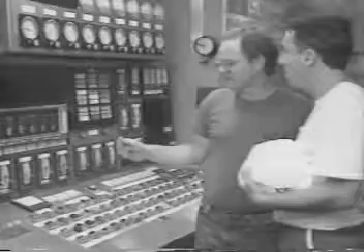The controller plays a critical role in any automated process because it's responsible for making the decisions that affect the process variables. However, the controller is only one of several components in a feedback control loop.

A control loop is designed to respond to upsets in the process. Upsets are external conditions that change the demand placed on the process. These conditions cause changes in the controlled variable. Information about these changes is gathered by the sensor.

The sensor changes this value to a signal, which is sent by the transmitter to the controller. The controller compares the signal to a set point and, based on the deviation, decides if any action needs to be taken. The controller's output signal positions the final control element.

The final control element responds to this signal by changing the value of the manipulated variable. The manipulated variable, in turn, affects the value of the controlled variable, which is again detected by the sensor. The cycle is repeated until the value of the controlled variable matches the set point.

How this is accomplished, that is, the mode of control action, is a function of the controller. There are 4 modes of control: two-position, proportional, integral, and derivative. Two-position or on-off control is discrete, so that the signal to the final control element is either 0 or 100%. Proportional, integral, and derivative control are continuous modes of control. Controllers may have one or more of these control modes.

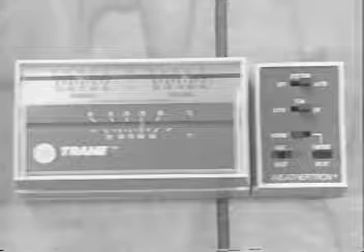Let's look at two-position control first. It's the simplest mode. A heating system, for example, might use this type of control. The heating system turns on when the room temperature falls below a set point. When temperature exceeds the set point, the system turns off. In other words, it has 2 positions, on and off.

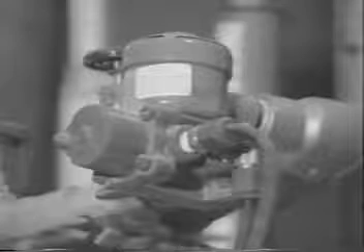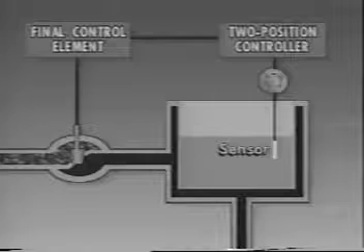Two-position control is used in industry when only 2 stages of control are needed. A typical industrial two-position control process might use the same operational principles shown in this diagram. Here, liquid in a tank must be kept within a certain temperature range. In addition to the two-position controller, the components in this feedback loop include a sensor, transmitter, and a final control element.

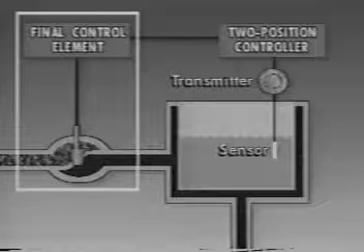The final control element in this diagram is a valve. Changes in temperature are detected by the sensor and transmitted as a signal to the controller. The controller determines that the temperature is below set point and sends an output signal to open the steam valve. The valve opens, sending steam, the manipulated variable, to heat the tank.

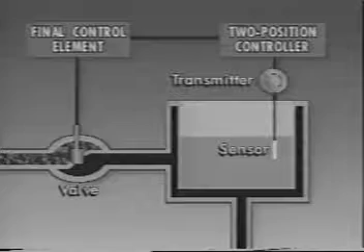Feedback is continuous. So when the temperature of the liquid in the tank rises above set point, the cycle is repeated and the steam valve closes. In this example, the control mode is simple: 2 positions, open or closed.

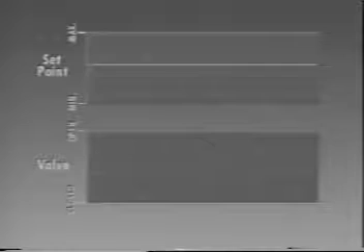This process can also be illustrated graphically. We'll assume that the liquid in the tank is at set point and the valve is closed. The liquid begins to cool and the temperature drops below set point. The controller, responding to the sensor's signal, generates an output signal to open the valve.

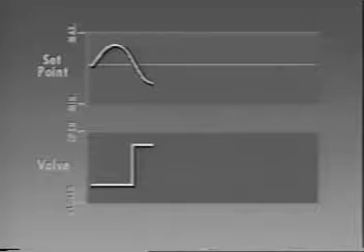The temperature, however, continues to drop. Remember that the control loop doesn't act immediately because of the response time of the sensor. Also, it takes some time for the steam to heat the liquid in the tank. The temperature eventually begins to rise.

When it's just above the set point, the controller again senses the deviation and closes the valve. Because of response time, the temperature continues to rise slightly before it drops. When it drops just below the set point, the valve opens and the cycle continues.

You can see how two-position control causes oscillations in the controlled variable. If oscillations in the controlled variable can be tolerated, two-position control is adequate. If the oscillations can't be tolerated because of the nature of the process, a different control method must be used. Information about two-position control can be found in your workbook.

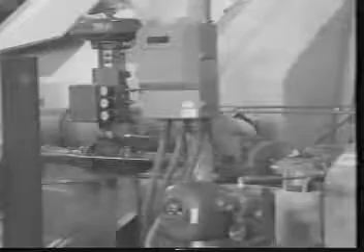The oscillations that result from two-position control may not be appropriate for some systems. The two positions of the final control element may provide either too much or too little control. Those systems that can't tolerate significant oscillations require proportional control.

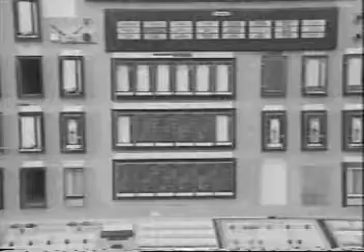Proportional action provides continuous control. This means that the final control element can be positioned at any point within its throttling range, not just on or off. Because there's a finer degree of control, oscillations are minimized.

Proportional control is often used if the value of the controlled variable changes in response to upsets. As I said, this records the outlet steam pressure of the boiler. When the boiler pressure reaches 900 psi, a pressure gauge on the header senses that, so the fuel flow to the boiler is reduced. There's a transmitter in the field, same place as the sensor.

That's what generates the signal. So the controller detects a difference between set point and actual pressure. It sends a signal to the control valve. The valve closes, reduces fuel flow, and boiler pressure drops.

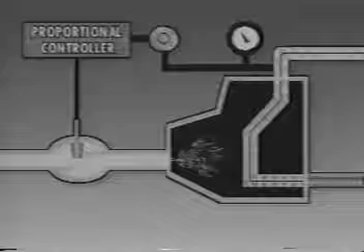That example of simple proportional action can be illustrated by this diagram showing control of boiler pressure. Fuel is piped into a boiler where it's used to heat water. The resulting steam is used throughout the plant. Fuel flow is controlled by a valve.

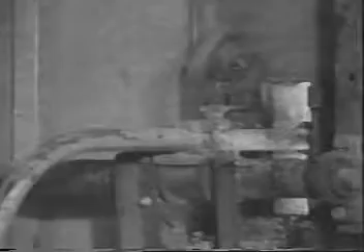Because of the dynamics of the process, two-position control would not keep boiler pressure within tolerable limits. The on-off action of the valve would cause either too much or too little fuel to reach the boiler, causing pressure to fluctuate. Proportional control action helps avoid this problem.

Most of our controllers are proportional because our boilers need a pretty accurate degree of control. We've got to be able to position that equipment any way that's necessary to keep boiler pressure within range. Come on, let's take a look.

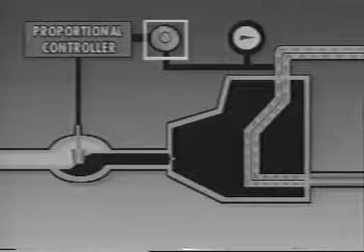When proportional control action is used in this example, the controller receives the signal from the pressure transmitter on the header. The controller responds to any deviation from set point by positioning the final control element, that is, the fuel control valve, in proportion to the deviation.

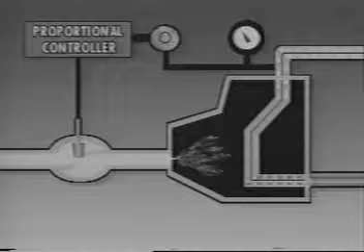The valve can be in any position, open, closed, or anywhere in between. This allows for more gradual adjustment of fuel flow as the pressure in the boiler changes. Proportional controllers can maintain a continuous relationship between the controlled variable, pressure in this case, and the position of the final control element.

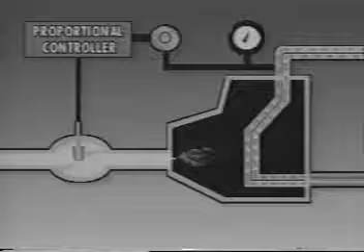If the set point of the outlet pressure is 900 psi, the controller will move the fuel control valve to a position that will help achieve that pressure, and the valve will be continuously repositioned to maintain the desired pressure. This relationship between the value of the controlled variable and the position of the final control element can be shown graphically.

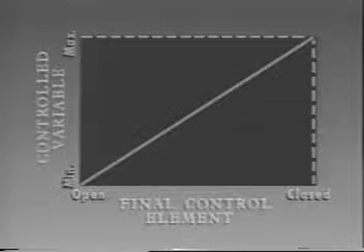When boiler pressure, the controlled variable, is at maximum, less fuel is needed. The valve is nearly closed. Likewise, when pressure is at a minimum, the maximum amount of fuel is needed so the valve is fully open. In other words, it takes a full range of input to produce a full range of valve movement.

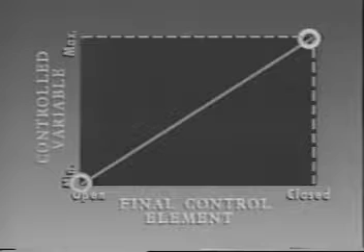Any other changes in pressure cause the proportional controller to readjust the position of the fuel control valve proportionally. In most cases, the amount of proportional control action can be adjusted. This adjustment is referred to as changing the width or percentage of the proportional band.

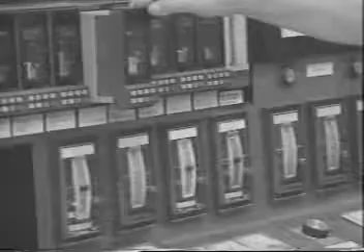Proportional band is defined as the amount of input change needed to provide a full range of output change. It's usually referred to in percentages of input. Changes in proportional control action are also expressed as changes in proportional gain.

Proportional gain is the ratio of the change in output to the change in input. In the example we've been using, it takes 100% input to achieve a full range of output. So the proportional band is 100% and the gain is 1.

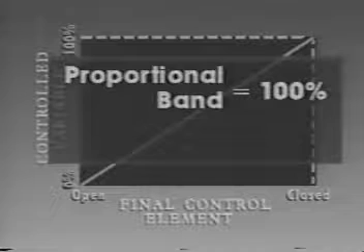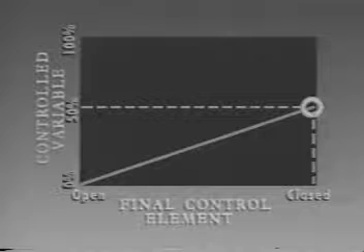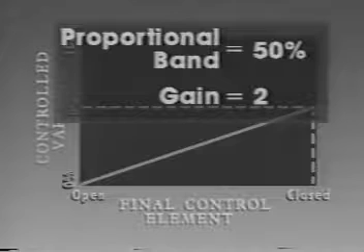If the proportional action were adjusted so that only half the change in input would be needed to fully open or close the valve, we would achieve the same output with half as much input. Since you need only 50% of the input to achieve full output, the proportional band is 50% and the gain is 2. You can achieve the opposite effect by adjusting the proportional action in the other direction.

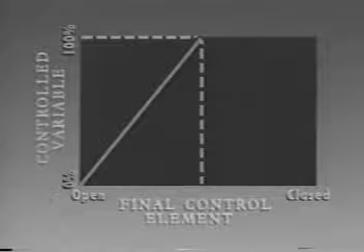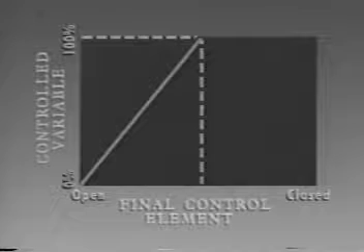In this case, a full range of input change results in only a 50% change in output. The result? The same input with half as much output. Since you need twice the input to achieve full output, the proportional band is now 200% and the gain is 0.5. A wide proportional band, or low gain, corresponds to a less sensitive response.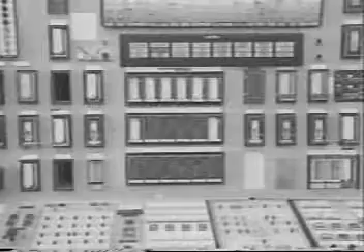A narrow proportional band, or high gain, corresponds to a more sensitive response. Because you may be adjusting the proportional band in various feedback control loops, a sound understanding of proportional action is essential. Your workbook contains information on proportional band and proportional gain.

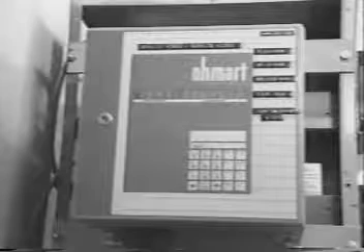The amount of control action that's needed depends on the process. Each process has its own characteristics and variables, so each process has a specific proportional action within which it operates efficiently. Extremes in proportional action can be illustrated graphically.

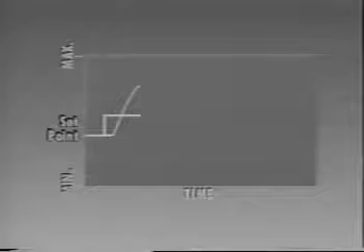When proportional action is excessive, even a relatively small change in set point results in a significant change in output. This can cause an oscillating effect similar to two-position control action. On the other hand, insufficient proportional control action allows virtually no control.

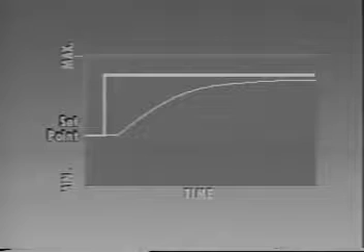A large change in input causes very little change in output. Control action takes place very slowly over a long period of time. Generally, proper control action is somewhere between these two extremes.

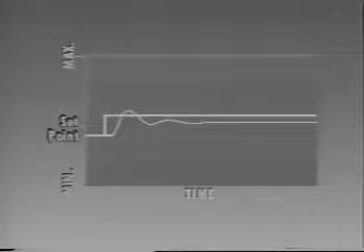Oscillation occurs, but not too much. Control is quick, but not so fast that the process fluctuates erratically. However, notice that as the oscillations settle out and the process reaches a steady state, there's a difference between the set point and the value of the controlled variable. This condition is known as offset.

Offset is inherent in proportional control systems. To understand offset, think of how you control the speed of a car. Suppose you're driving along a flat road at 45 miles per hour, the speed limit. The position of the accelerator is proper to maintain your speed.

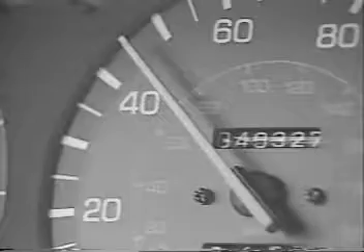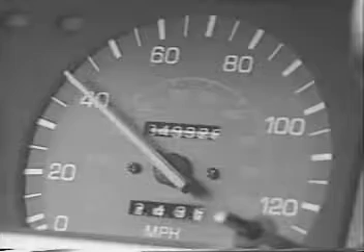Now you begin to climb a hill. Your speed starts to drop. Your response is to apply proportional action, that is, to depress the accelerator an amount proportional to the amount you have slowed, or the error. As you do so, the speed stops dropping and steadies out again.

You're now climbing the hill at a constant speed, using more gas. However, you're no longer traveling at 45 miles per hour. You're moving at a slower speed, say 40 miles per hour. This difference is offset. How do you correct for offset?

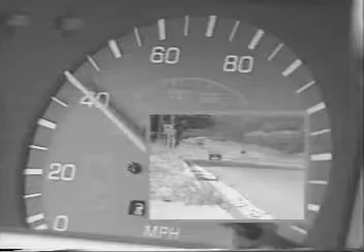You give the engine a little more gas, recheck your speed, and give it a little more gas if necessary. Then you continue this sequence of adjusting and checking until you've reached 45 miles per hour again.

Industrial proportional controllers usually have a second control action to do this checking, adjusting, and rechecking until the controlled variable is back at set point. This is called integral action.

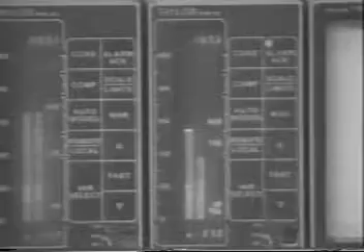Integral action, sometimes referred to as reset action, continues to provide additional control action as long as offset is present. Integral action adjusts the output until the process returns to set point. With integral action, the output called for by proportional action is repeated until the final control element is positioned to correct for offset. Proportional plus integral control is often referred to as PI control.

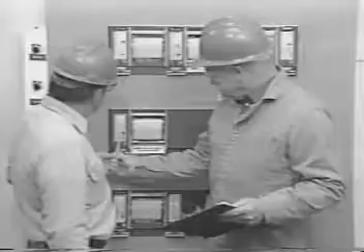Proportional and integral control can also be combined with derivative, or rate, control. To understand derivative control, let's go back to the driving example. Suppose you reach the top of the hill and begin to go down a steep grade.

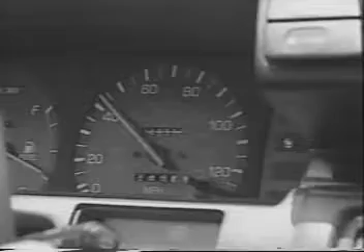As soon as your speed begins to increase, your first action is to remove your foot from the accelerator and apply the brakes. Then, as your speed stabilizes, you begin to carefully apply gas, using proportional and integral action to return your speed to the desired value, or set point.

Your first response was to overcompensate for the rapid change in speed by lifting your foot off the accelerator. This action is similar to derivative control. Derivative control responds to the rate at which the process is deviating from set point. Once the change has stopped, proportional and integral action continue until the set point is reached.

Proportional plus integral plus derivative action is called PID control. PID control is useful in processes that are slow to respond and need additional control action. With derivative action, the controller responds more quickly, so the final control element is positioned faster. As a result, overshoot and oscillations are reduced.

Technicians and operators who work with control processes should understand how proportional, integral, and derivative control work together to provide an efficient and accurate means of automatic control.

So that boiler we just saw is controlled automatically. Yeah, any offset is automatically corrected by integral control action, like fuel flow to the boilers. When there's a change in demand in the system, the control valve's going to wind up in a position that either lets in too much or too little fuel. So integral control action repositions the valve to compensate for that offset.

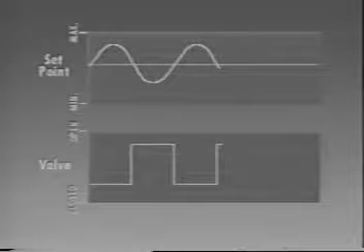Two-position or on-off control responds only to the presence of an error or deviation. It's a relatively inexpensive and simple control mode. Two-position control action often results in oscillations in the value of the controlled variable. Two-position control is useful in applications where the process does not need a fine degree of control and can tolerate these oscillations.

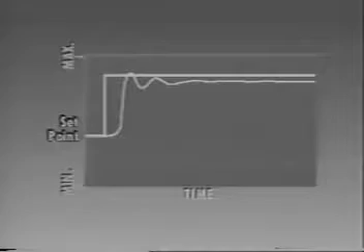More precise control can be obtained through proportional control action. Proportional control action provides continuous control by responding directly to the magnitude of the error or deviation. A proportional control mode that does not include either integral or derivative action is a relatively simple type of control.

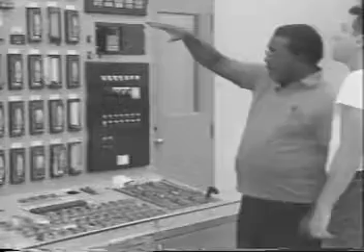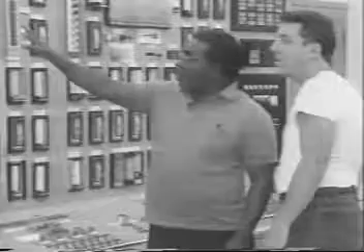It is inherently stable when the controller is properly tuned, that is, when it is adjusted to work within the process it is controlling. Proportional control alone is also relatively easy to tune, as compared with PI or PID control.

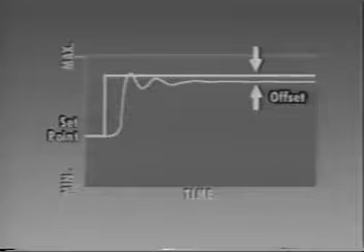When offset occurs in a proportional control mode, the offset occurs at a steady state. Remember that offset is inherent in proportional control modes and must be corrected.

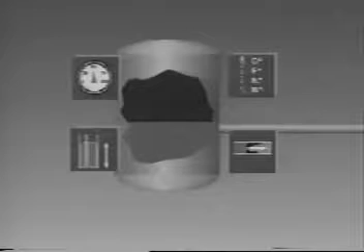Like two-position control, proportional control can be applied to processes that do not need precise control. For example, when liquid level in a tank does not need to be maintained at a critical level.

Integral or reset action is often combined with proportional action to correct for the offset that's inherent in all proportional control. Integral action responds to the duration of the error.

Proportional plus integral, or PI control action, corrects offset by bringing the actual value of the variable back to the set point after an upset has occurred. Proportional plus integral control has a somewhat faster response than proportional action alone, although not as fast as PID control.

With integral control, there is a lag time before offset is corrected. In some cases, this results in instability in the process loop.

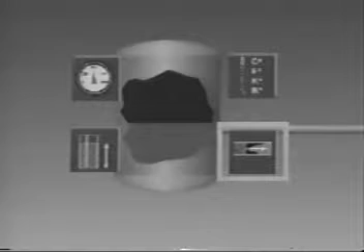One exception to this is flow control. Flow control loops are very fast and often noisy. Integral control action is often added to the feedback controller in these loops to provide a dampening or filtering action for the loop.

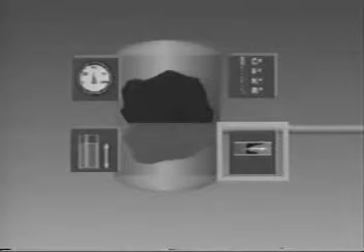Derivative or rate action may be combined with proportional and integral action to compensate for processes that have a slow response. Derivative action responds to how rapidly the process is deviating from set point.

Proportional plus integral plus derivative, PID control, is the most complex of the control modes discussed so far. A PID controller responds rapidly to upsets in the process with less lag time and prevents overshoot in output.

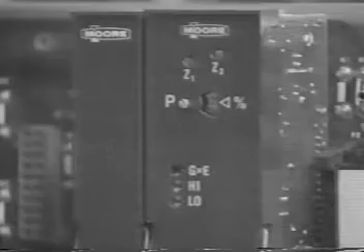PID controllers are difficult to tune because there are three separate adjustments that must be made. However, the more accurately they are tuned, the more precise the control of the process.

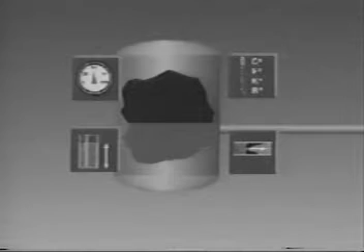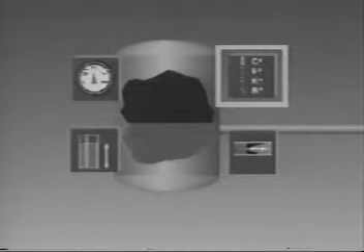PID controllers are more common in processes where temperature is the controlled variable, because the response times of these processes are relatively slow. PID controllers are rarely found in flow control, because the process itself responds so quickly that any derivative action would overcompensate for the upset.

This overview of the types of control modes will help you apply control theory to the processes in your facility. Remember, however, that designs and operational principles differ, so always follow the manufacturer's instructions and your facility's guidelines before working on any control instruments.